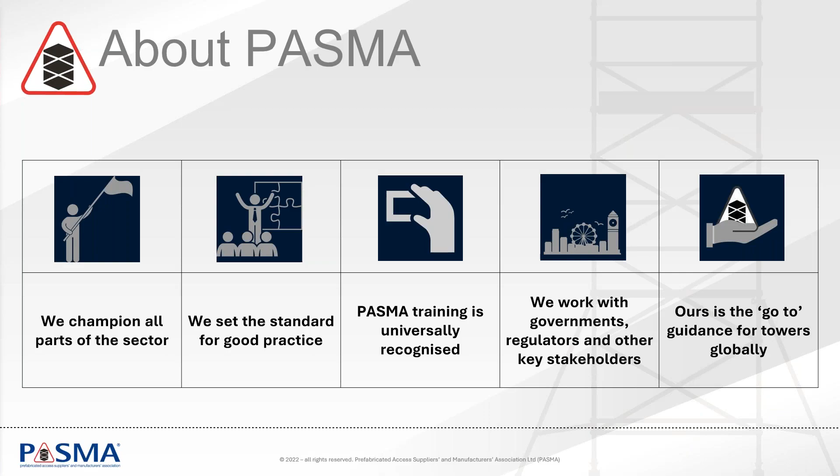Mobile towers are versatile, easy to transport, simple to assemble and can be used in multiple configurations without any specialist tools or equipment. Towers also provide greater Scope 3 environmental benefits over other forms of access. This is due to the compact nature of component storage, transportation required, and the lightweight requiring smaller vehicles to deliver and collect.

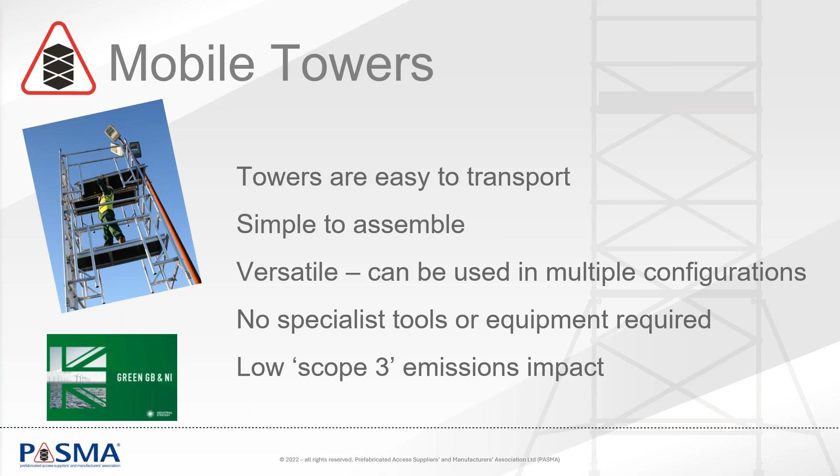The carbon footprint is a very, very dear thing to PASMA as an organisation. We're doing everything we can to reduce and where possible balance our carbon footprint. We're doing this in the way in which we plan to digitise a lot of our presentations and the way in which we reduce paper input and use.

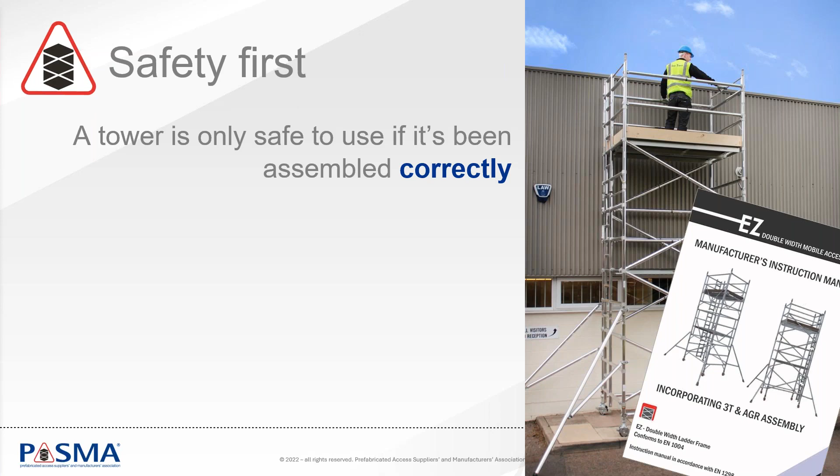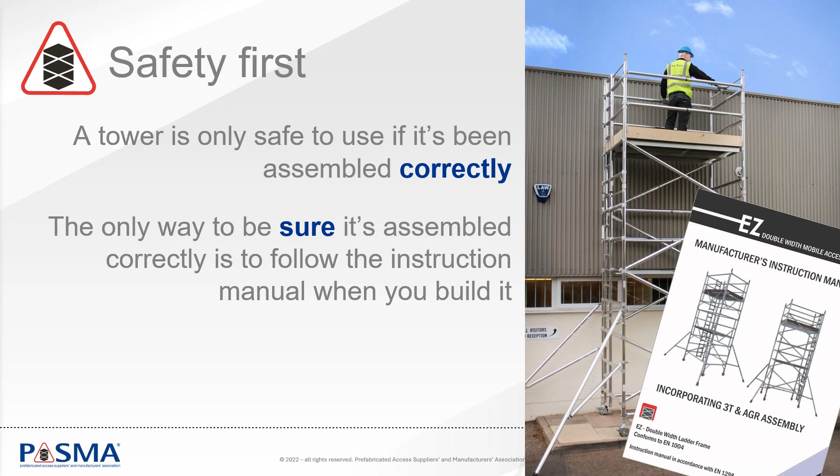So, towers. A tower is only safe to use if it's been assembled correctly. I think we all realise that a badly assembled tower is potentially dangerous. So, the only way to be sure it's assembled correctly is to follow the manufacturer's current instruction manual when you build it. However, the first step before we build the tower is to ensure the correct tower has been selected. Taking into consideration the height, width, platform length, loading, these things are all important to make sure the right tower is there for the people to work on. This must be balanced, of course, with the operator's competence, ability and training.

There are nearly 250 registered PASMA training providers who can offer a range of PASMA training courses to ensure competence in the selection, assembly, inspection, movement, alteration, dismantling, use, and the maintenance of mobile access towers, as well as an understanding of the manufacturer's instructions, standards, and general good practice in the safe use of mobile towers.

The pre-use inspection of each component is an important part of the pre-assembly process. Again, ensuring all components are complete, undamaged, compatible, and operating correctly. A tower is only safe to use if it has been assembled correctly, as we've said before. If it hasn't been assembled correctly, it could topple over or collapse. That's why before we start working from a tower, it's important to inspect it, to double check that everything is okay. It makes you stop, take a step back and double check that everything looks okay before anyone starts working from the tower itself.

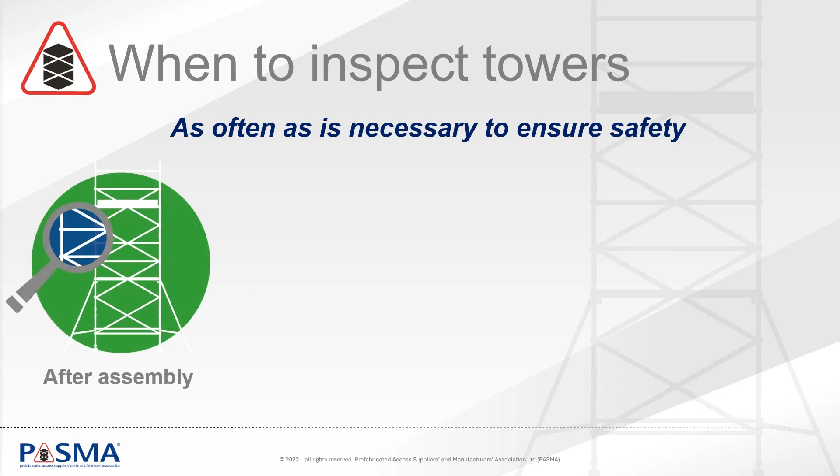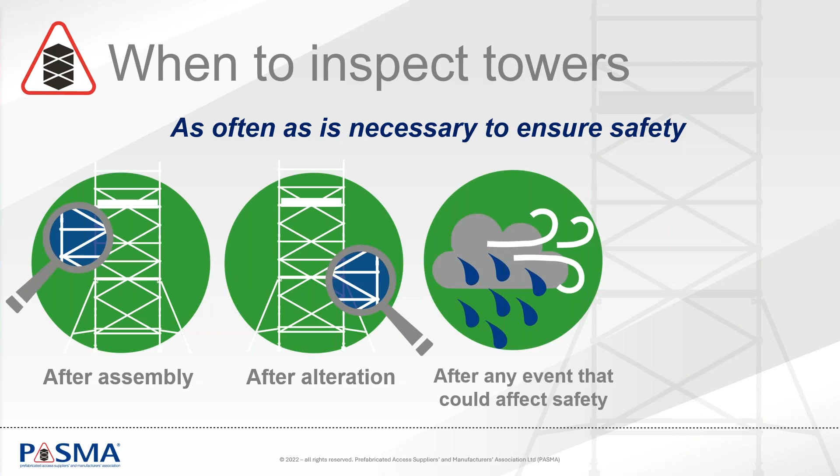I think we'd all agree it makes sense to regularly check our kit, especially when you're using it to work at height, as failure can be catastrophic. But there are times when our statutory duties mean we must inspect a tower and keep records of that inspection. So towers must be inspected after assembly, but before first use. Also, inspect and keep a record of any alterations that are significant. A significant change in height or size or structure should require either a new inspection, or it may even be a new tower. Or after an event that might have affected its stability or structural integrity, such as high winds, storms, or unauthorised amendment or use.

If none of these have occurred, you need to inspect and keep a record of that inspection at least every 7 days. These are the minimum requirements. The reality is you need to inspect your tower as often as necessary to make sure it's safe to use. And it might mean that you decide, if you're using a tower outdoors in winter or in a high-risk environment, to inspect it more often than 7 days.

We're often asked if you need to inspect a tower every time it's moved around the same location. The simple answer to that is no, not unless you've had to significantly alter it or move it, and something's happened that made you think the structure or the safety of the tower has been brought into question.

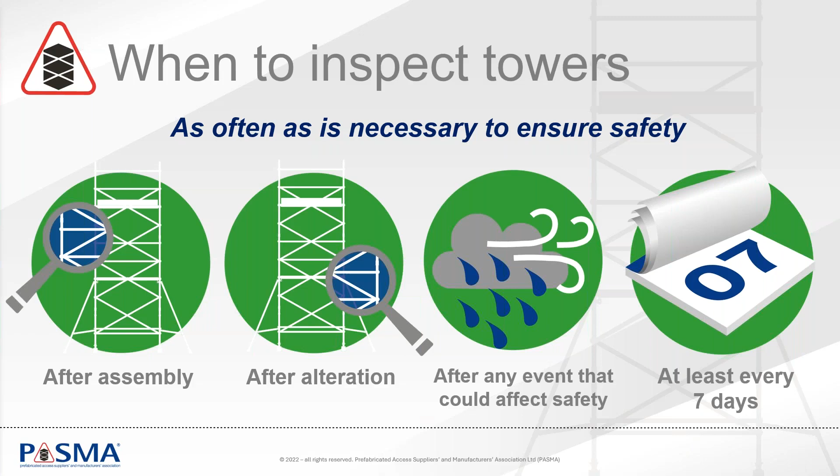If you need to build and inspect other configurations of towers, such as cantilever towers or link towers, or even low-level access products such as podiums, there are separate dedicated courses for these, where competence in this particular range of equipment can be gained.

Managers and supervisors can learn to inspect any standard configuration tower on a PASMA Tower for Managers course. This course is aimed at anyone who manages work at height activities of other tower users, but isn't assembling towers themselves. It doesn't matter if a tower is inspected by the same person who assembled it or by someone else. The key thing is that you've been trained on how to complete an inspection correctly and record the findings.

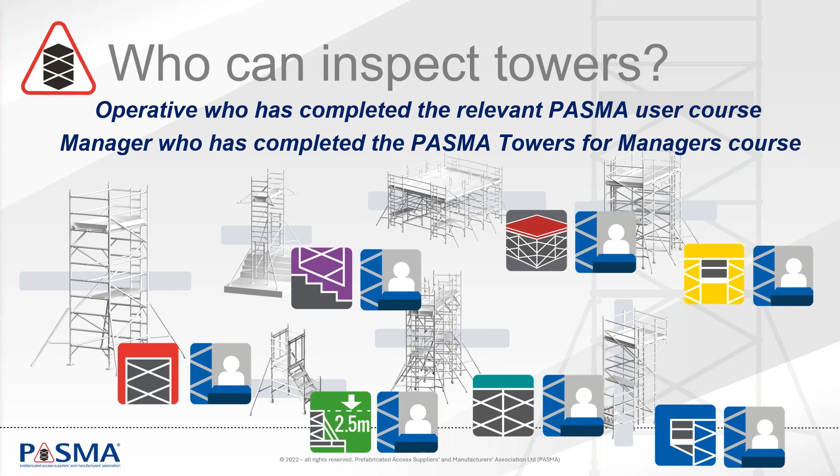So, a simple question now is, how are towers currently inspected? Well, the normal process would be someone who's competent, who in most cases now would be seen to have been a PASMA trained operative, assembles their tower, checking all the components are undamaged and fit together correctly. And then they inspect the tower structure, recording this inspection by labeling, often called tagging, the tower as safe to be used.

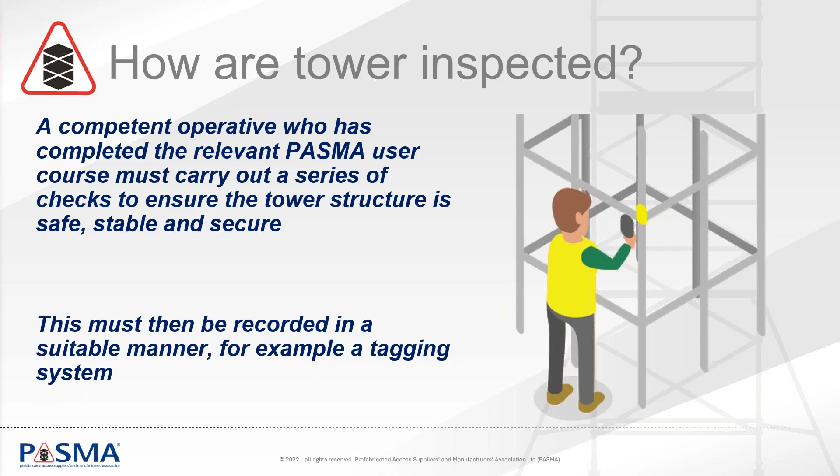Now, there have been several issues around this in the way in which these tags are completed and signed off. So these might include what components were actually checked. The parts of the tower that are critical to the safety of the structure need to be inspected correctly. And I've often had this when I've questioned operatives and asked for their internal inspection checklist, and quite often they just look back at the tower and go, well, it looks all right, it's upright. One of the things we need to realize is checking the components one by one, making sure they're functioning, they're fitted correctly and operating correctly is vital to the tower's stability.

Another issue, who signed the inspection off? I mean, I've often seen inspection tags or labels signed off in thick felt pen where you can't read the name, or as one person said, Mickey Mouse, who doesn't really work here, but I don't want to take responsibility if it goes over. So they must be signed off correctly and must be legible.

The other, and probably one of the most important things that I've often talked to managers about, how do you see the documented evidence of that inspection? Now, if we've got, for instance, a tower label, it's a small piece of plastic, some 8 inches long by 3 inches wide. It's cable tied, wire wound onto a tower, and it stays on there while the tower's up. But afterwards, does it really get back to the office? Does it really come through as what you would like to stand up as a legal document?

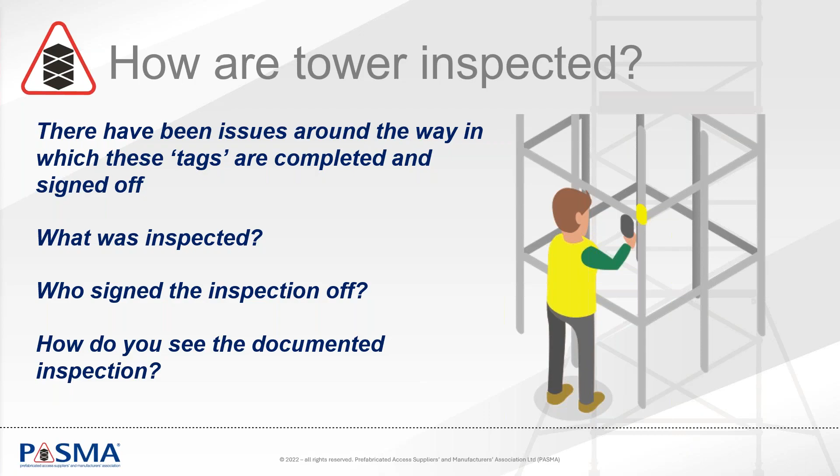So this comes to the question of how can we remedy this problem? So what is Towersure? Now, we have been at PASMA a long time working on this. It has been a major breakthrough, we feel. I know it's quite bold to suggest that Towersure is a game changer for tower safety, but we truly believe that it will bring tower safety to the forefront and make it easier for you to achieve the goals that you want to achieve, which is the inspections are carried out consistently, correctly, and most importantly, the evidence is there and easily gained through a digital medium. So how can we achieve this?

Towersure guides operatives through tower inspections. This means the managers can be sure that the tower inspections are thorough and done in a consistent way, using PASMA's approved methods every single time.

There are built-in competence checks, so managers can be sure operatives and subcontractors have been trained on the towers they're building and inspecting. That's right, I said subcontractors. So with this system, there is the ability to not only control the tower builds of your own staff, but also to link your subcontractors to it. So when they're building towers on your behalf, they would have to use this system and you would have full visibility to every inspection they carried out on your sites.

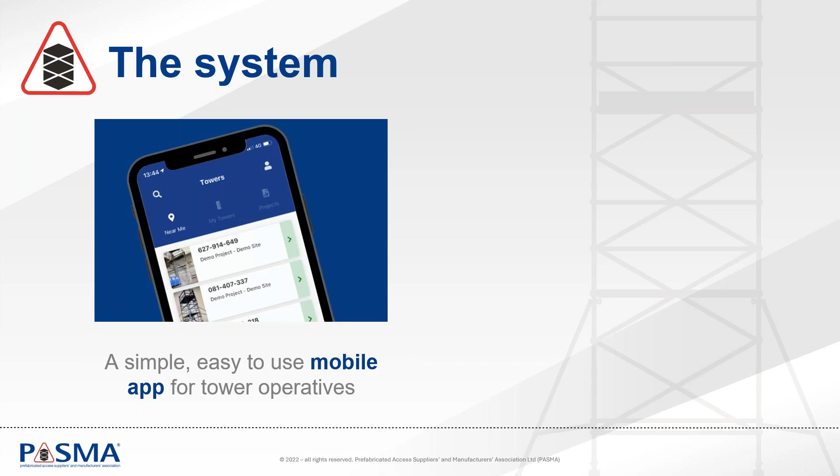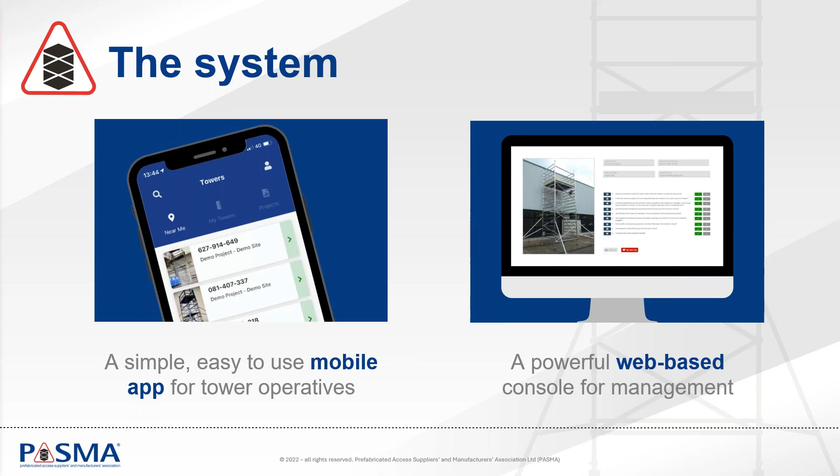And then that's followed up with a powerful web-based console for the management. So hopefully you can start to see the relation between the app and the console. The operatives on site will do their inspections, and when they click that that tower is inspected, it will appear on the portal for you to see. And you can control that from that portal. So the system depends on a mobile app your tower operatives install on their phones. By tower operatives, obviously we mean anyone who's out there on site inspecting or using towers.

They do need a phone for this to work, but they do not always need a Wi-Fi or mobile signal, as the app will record the inspection, and as soon as the phone is in a signal or Wi-Fi area, it will then transmit that to the console. The app is simple to install, it's easy to use, and it's going to change the way in which we inspect and use towers.

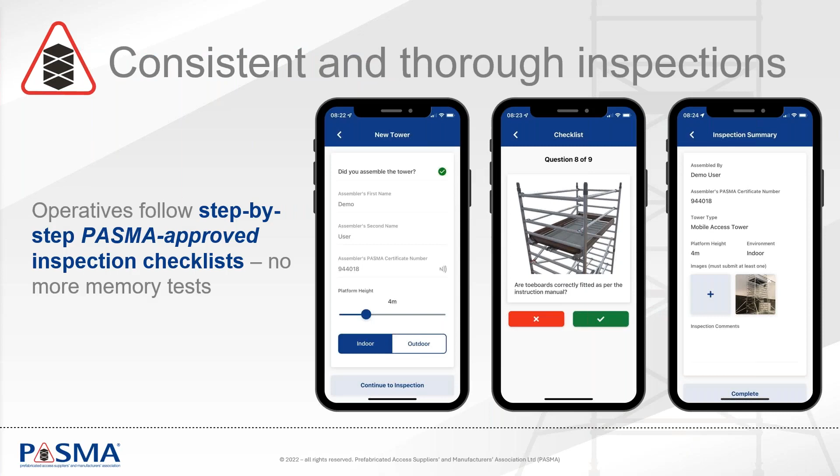You'll be aware that there are lots of things you need to check to make sure a tower is safe to use, from the casters on the ground to the guardrails at the top and everything in between. Today, operatives are probably relying on their memory. Now, if it's anything like mine, how easy would it be to miss something crucial? When these operatives attend a standard PASMA Towers for Users course, for instance, they're given an opportunity to inspect the tower before the instructor inspects it.

As someone who runs quite a few of these courses myself and has written them, quite often four guys will be sitting there and they will say they've checked the tower. Then I'll look at it and I'll find things that they weren't looking for, things that are quite critical, but they'll have missed them. So without a checklist, I really would question whether someone who's been on a one-day course could go out and remember every single component that needs inspecting and how it needs inspecting without some form of checklist.

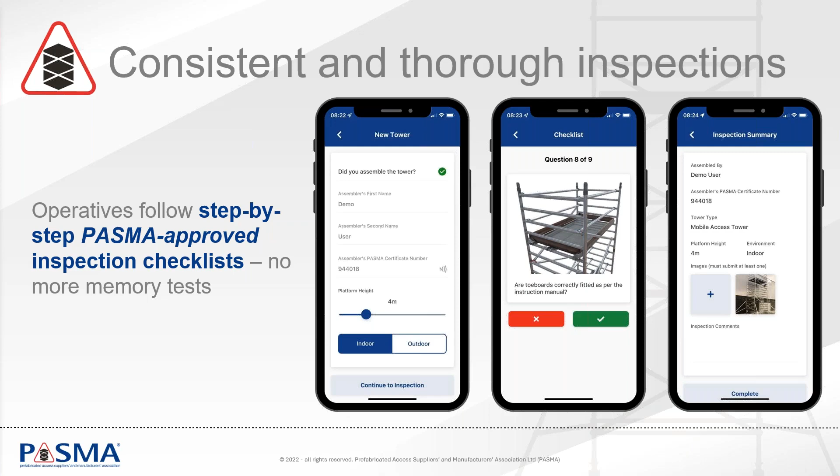Now, in the days before tagging, we used to have reports that actually told you what to check and when. Now we've gone more towards this tagging or labelling system. It relies on the operative remembering what to check. So how can we get around this problem? Well, the PASMA inspection app includes a step-by-step checklist in the form of questions, complete with images telling them what to check, where it will be, and instructions on how to check it.

In addition to that, it records the tower type, the platform height, and whether it is assembled indoors or outdoors. This is all verified with a photograph taken on the mobile phone's own camera and not from the photo library. We emphasize that because it means that you can only load a photograph onto the app if it goes through the phone's camera itself. You cannot load it from a memory. So you can load several photographs, or you can load just one photograph.

But the point is this records not only the fact they've been through a detailed check, and they've had to tick all the way through to say that they've checked every component that's required, and the checklist will change depending on the type of tower that they've indicated they're building. So there is a difference in the checklist between, say, a standard tower and a tower on stairs, or a link tower. So the checklist has been customized to the type of tower.

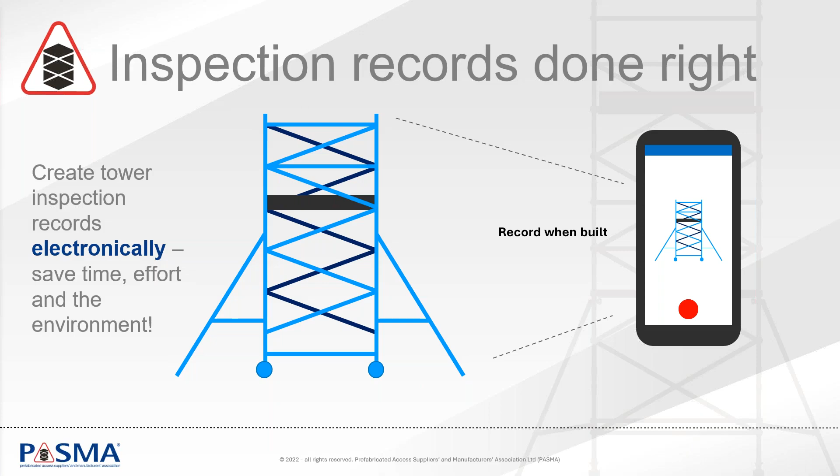So writing the details down of an inspection isn't just about having a record that can be filed away electronically or even manually. Inspection records need to be kept on site while work is undergoing, so they are commonly displayed on the base of the tower. This means everyone can see it's safe to use. So we're not suggesting getting rid of the physical inspection record or tag altogether, but we are going to make

them smarter. The Towersure label is a similar size and shape to the current PASMA inspection record or other tagging systems that are out there. They're intended still to be displayed at the base of the tower. The clever thing about the Towersure label is that they have a unique QR code on them, which anyone can scan with their phone to check the tower's inspection status.

Now, Towersure will work whether it's a main contractor, a client, an inspector, or someone just passing by. They don't even need to have the Towersure app on their phone to do it. Now, you don't need to use Towersure labels for the app to work. They just make things easier. So we're not removing the tagging or labeling of a tower.

What we're enabling is the inspection to be carried out via a standardized checklist that's focused upon the tower type, involving photographs, the ability to record all that, and the ability to link that inspection to a tag that's on the tower.

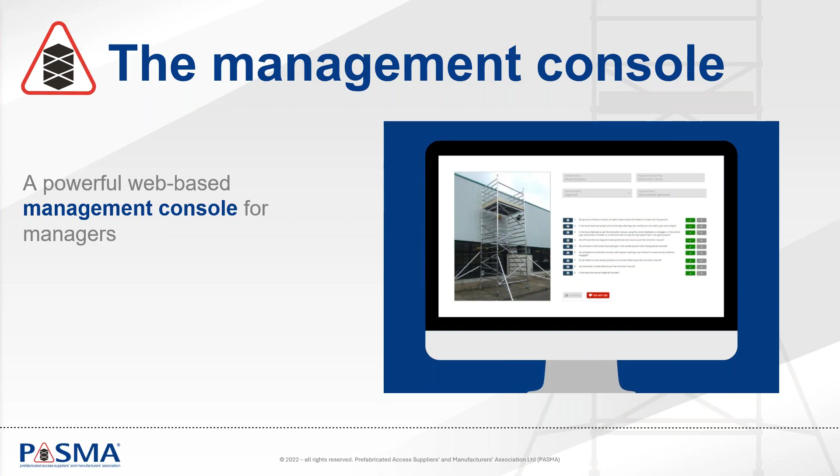So as I mentioned before, the app is just one half of the Towersure system. Everything that happens on the app feeds back to the central web console that you can have access to from any computer. So it's a simple one to use. I've been using it myself on a lot of training courses now, with the instructors using the app themselves, and it means that I can have, again, proof that the towers were correctly built on any training course and on what sites they were built. So it's as important for us as a training provider as it would be for you as a tower user or controller of people that use towers.

So complete visibility. The people who use this web console, we'll call them safety managers, have visibility of all the towers on all the sites on all the projects that they have been given access to. So here's the question. What can you do with this information?

Because they've been built and inspected correctly across all the sites and projects, because you can actually see what's going on. It's not just your own staff who will have the visibility, but you can give access to your subcontractors and clients too. So there's a lot of possibilities here. Ultimately, it means for the first time, you can have complete confidence that towers on your sites are safe and you've got the documented evidence to prove it.

So from the web console, you can see all the towers that are currently on your sites. You can click on any particular tower to view photos or the details of the inspection that was carried out of that structure. You can also spot check it. Wherever that tower is in the country, UK-wide at the moment, without leaving your office, double check it's been built and inspected correctly.

Now, I said you need to put at least one photograph, but you can put multiple photographs against the tower, so you can actually carry out an inspection via the photographs. And you can have different levels of authorization. You can allow the operative on site to do the inspection and sign it off, and you can view that, and you can still put a tick against do not use if you see something wrong. Or if you really want to control things, you can do it so they take photographs and then you can go through and check the photograph.

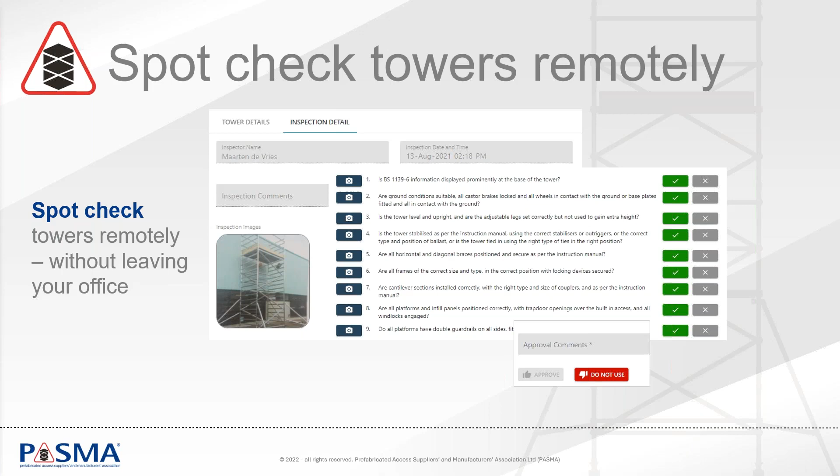So choosing to centralize inspections can make your life a lot easier. The system has several inspection options available. As I've said, the tower operator can approve inspections. They can set up for the safety manager to verify before use, or you might want to go even further and centralize your tower inspections. Now the system will let you do all of that.

That would mean that the operative on site wouldn't complete the inspection at all. They'd simply take photographs of all the completed structures, their components, before starting work, and wait for the safety manager to inspect it via the photograph and approve it remotely via the web console. You could do those remote inspections yourself internally, or even outsource them. I do suspect most people will allow the operatives to do the inspections, but the options are there should you wish to control it at that level.

And it may be an option you choose if you had a new work crew or people that you're not familiar with. You've got their qualifications on paper, but you haven't seen them work. So you may say, I'll verify your tower before you use it. It's there for you to control. That's the beauty of Towersure.

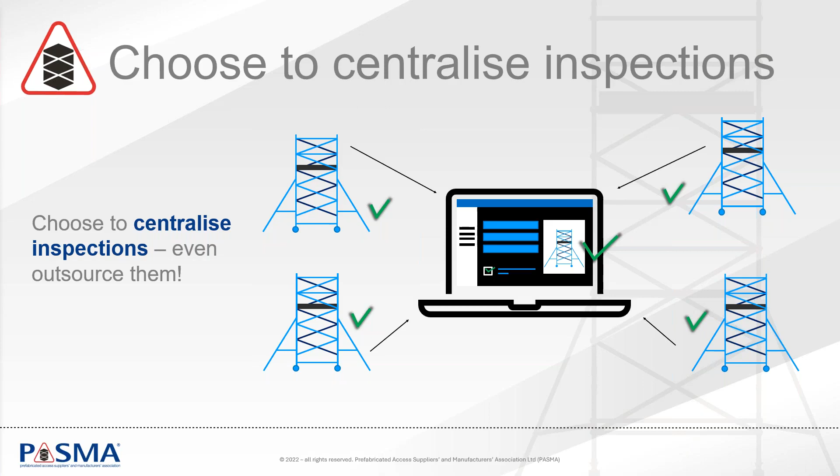So remember that creating and storing inspection records is a legal requirement. But we found that inspection records aren't always stored in a secure and retrievable manner. With this system, your safety managers have access to all the tower inspection records, so they'll never have any trouble laying their hands on one. They can search, download, email, and print records quickly and easily, and you know they'll always be complete, because the system will not allow an inspection to be completed unless every box is ticked.

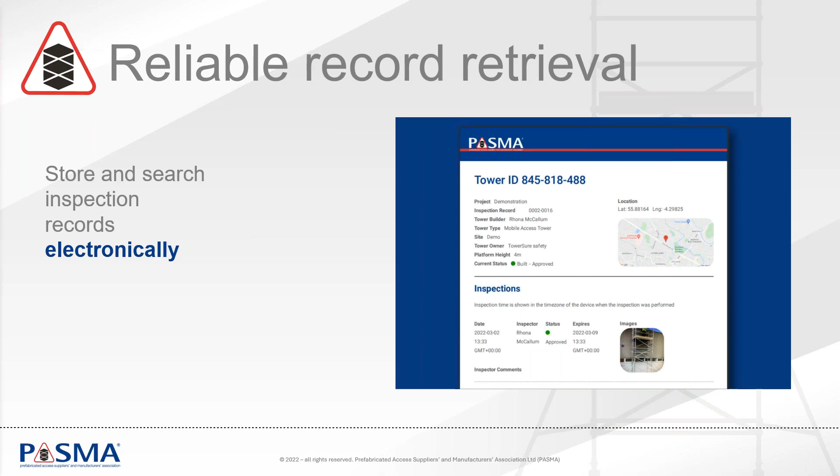If a tower is inspected multiple times before it's dismantled, as we said right at the start, it could require every 7 days or more frequently if you're in a high risk area. The printed record or transportable record would include those dates, those times, and the details of each inspection. So again, it's forming a complete paper trail, or electronic trail, should I say, behind every inspection. This document includes the information that's required in an inspection record under the Work at Height Regulations.

So you've got a system that ensures towers are always inspected properly and that everyone on site can easily verify its status before use. You know that inspection records are always created, always accurate, and always stored securely. And you're even capturing photographic evidence of each instance of a tower assembly. You've got a smarter way to check individual operators' competence, as it's tagged against each of the tower builds. And you can keep an eye on everything that's going on without leaving your desk.

All of this, we think at PASMA, makes it easier than ever to keep everyone safe who works at height using towers. Apart from the fact that you can sleep easier, it will lead to improved behaviours, because everyone building and using a tower will know that you can see how they're building and working on towers.

You already know that the Work at Height Regulations do place a legal requirement on duty holders, including employers, subcontractors, and employees, for undertaking and recording inspections, with increasing financial penalties for contravention of these regulations, and that's before we think about the reputational risk. Towersure helps you and your subcontractors comply with more of the regulation than any other system we've seen for managing inspections and competence, and it's a robust, reliable, and environmentally friendly way to do it.